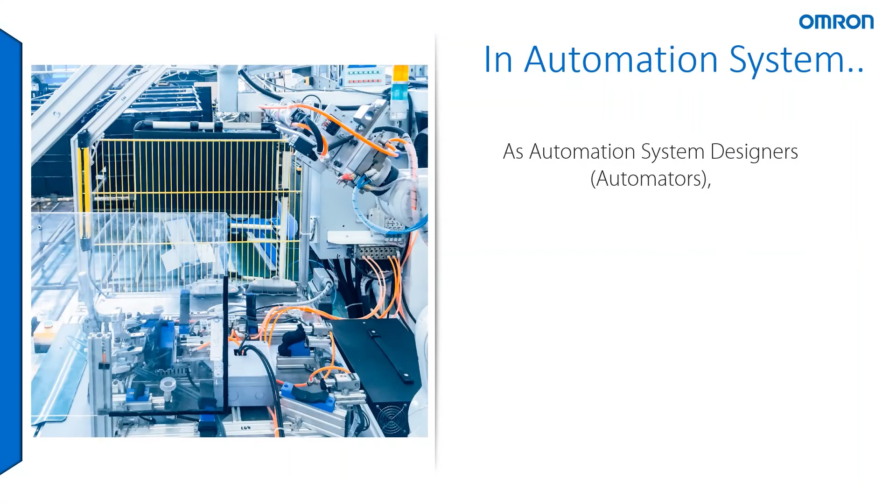In any automation system, you as automation system designers, automators, do you think that safety circuits are necessary? Please share your opinion on the screen.

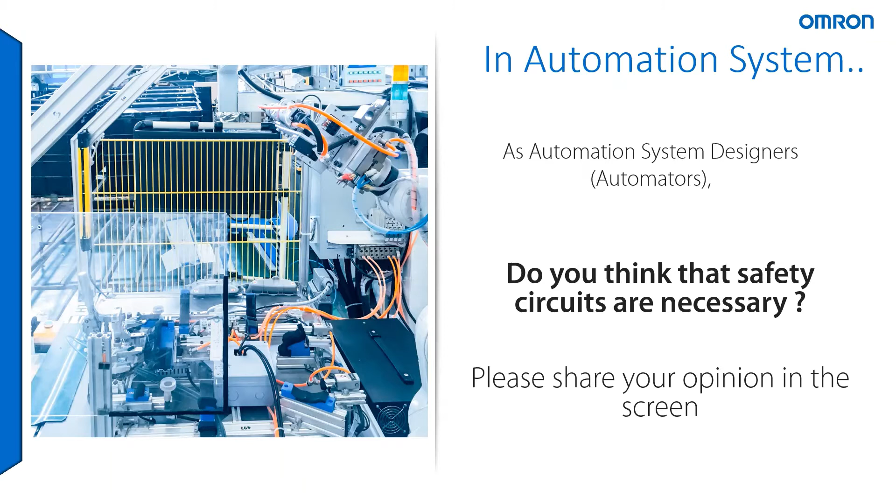Safe automation is everywhere. You, as automators, during the design stage should analyze the hazards and evaluate the risk generated in the machine and include your proposal in the design to make the machine safe. So in Europe, all kinds of machines should have several circuits such as source of power, control system, and safety.

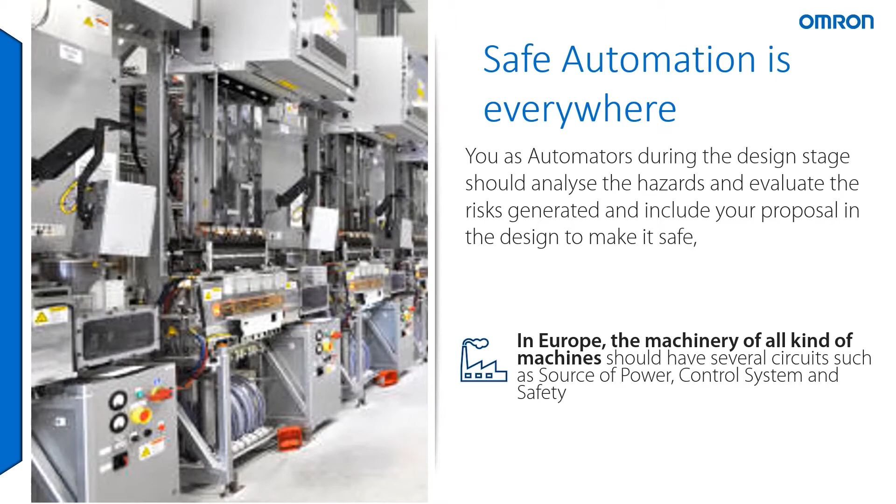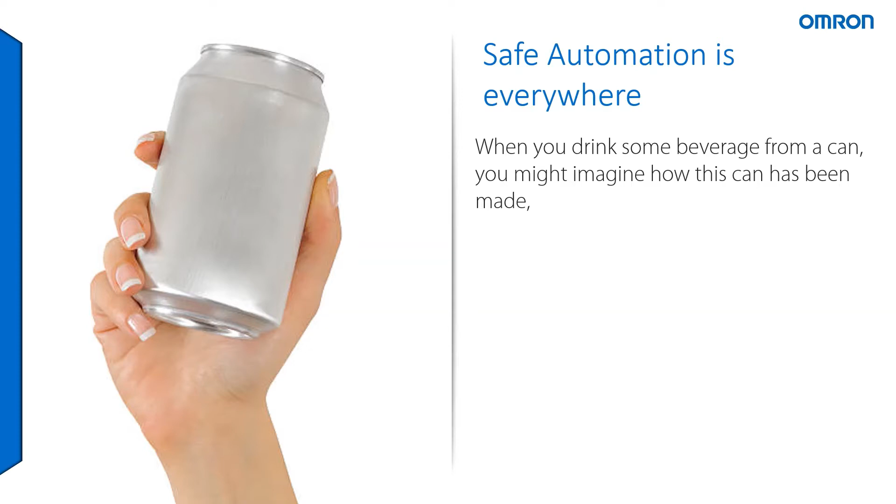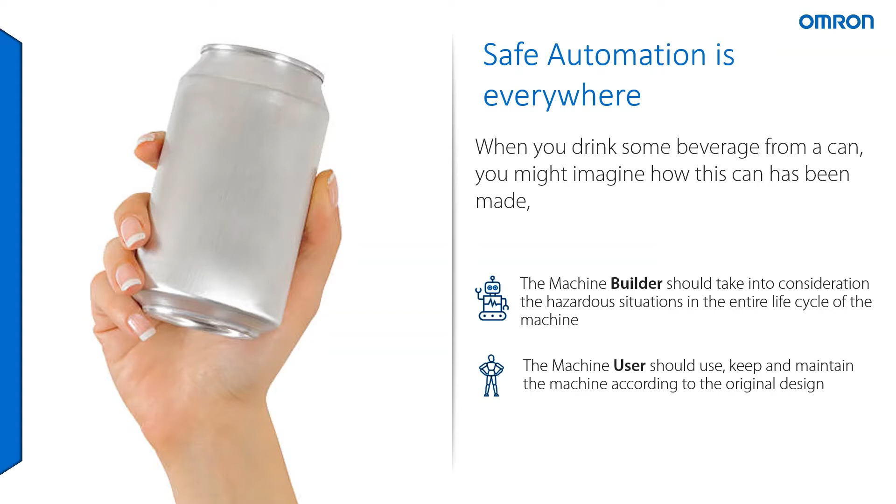When you drink some beverage from a can, you may imagine how this can has been made. The machine builder should take into consideration the hazardous situation in the entire life cycle of the machine. The machine user should keep and maintain the machine according to the original design.

The European Legal and Technical Framework, which is mandatory since 1st of January 1995, forces some different stages in European machinery. So that means if you are outside of Europe, you don't need to fulfill that. But if you are selling or using machinery in Europe, you are forced to use that. You can identify that by looking for the CE marking logo on the machine.

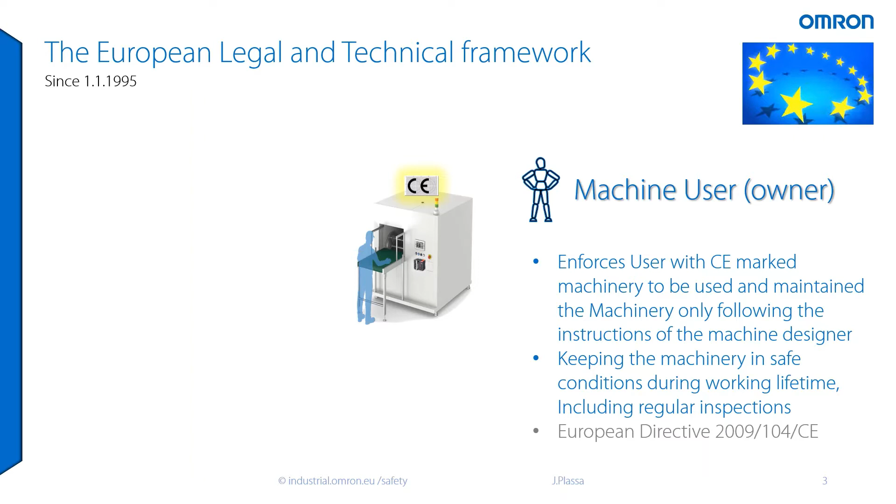For the machine user, which is the owner, the production, it enforces the users of CE marked machinery to use and maintain the machinery only following the instructions of the machine designer. It also forces them to keep the machinery in safe conditions during the working lifetime, including regular inspections. You can find further information in the European Directive 2009/104/CE.

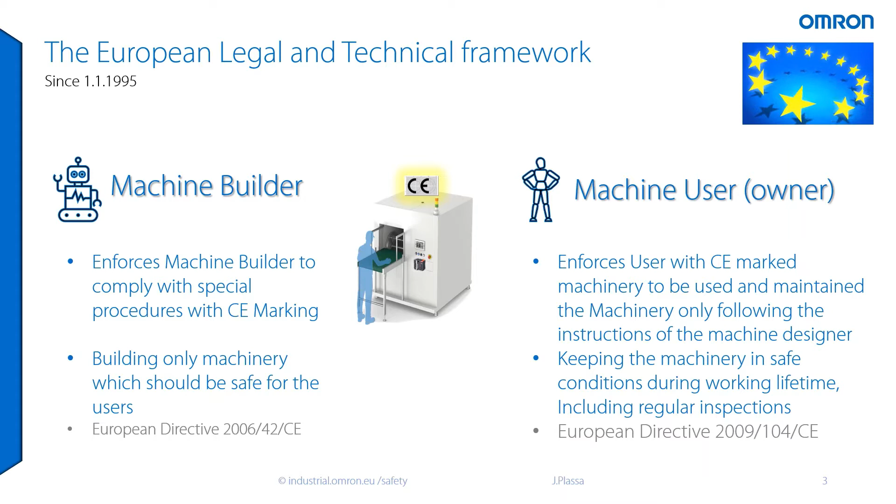If you are a machine builder, it forces you to comply with the special procedures within the CE marking, building only machinery which should be safe for the users. You can have further information in the European Directive 2006/42/CE.

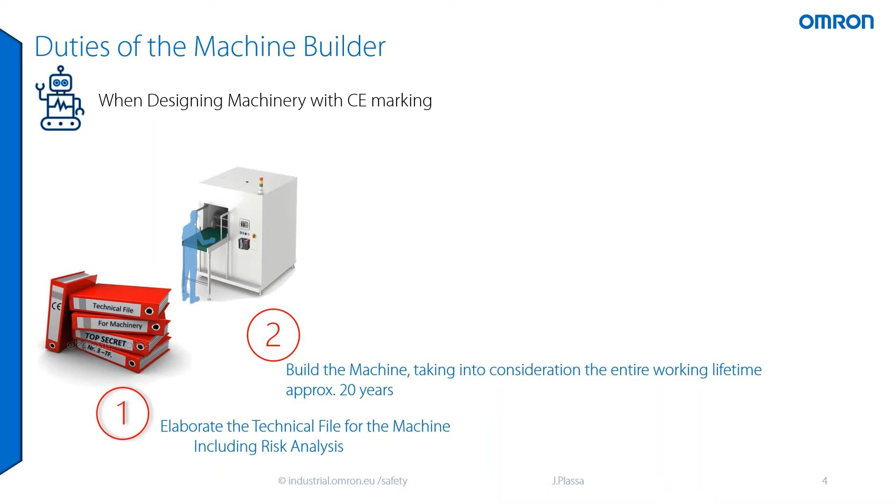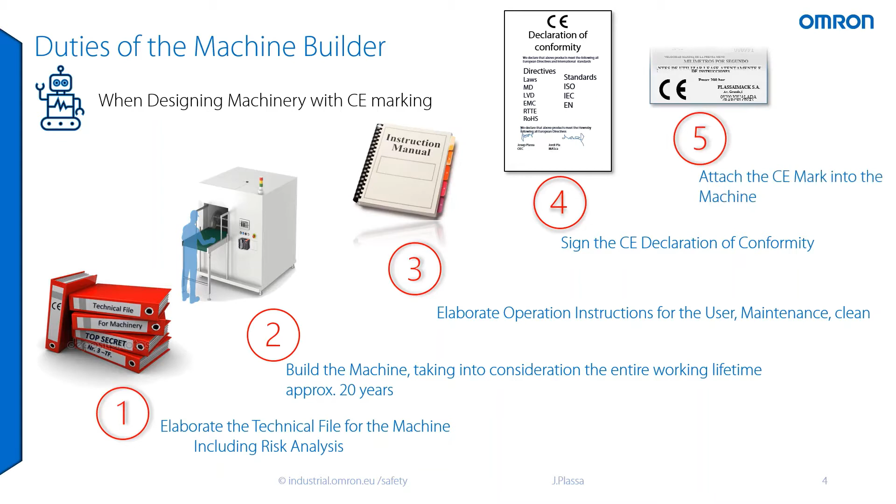But which are the duties of the machine builder when designing machinery with CE marking? First of all, elaborate the technical file for the machine, including the risk analysis. This information is top secret and needs to be kept in the machine builder facilities. Secondly, build the machine, taking into consideration the entire working lifetime, approximately 20 years. Third, elaborate operating instructions for user maintenance, cleaning, etc. Fourth, sign the CE Declaration of Conformity. Fifth, attach the CE marking to the machine and also put the CE logo.

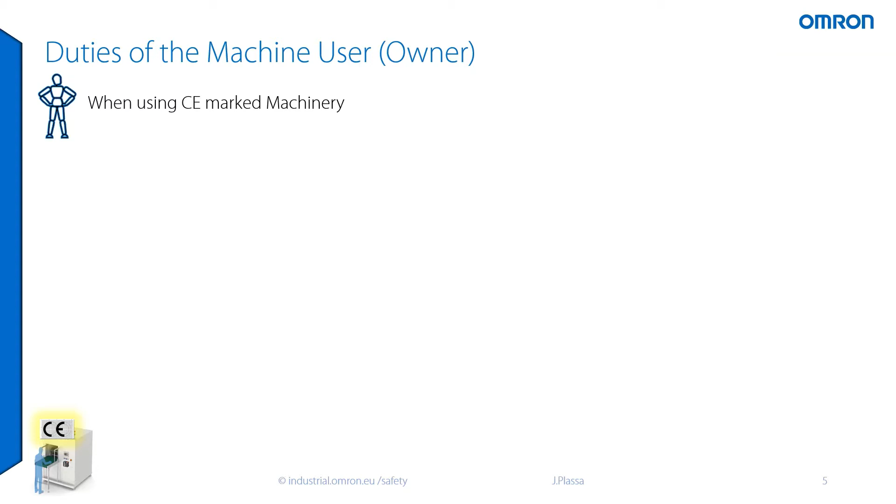But in case you are maintaining this machine, which are the duties of the machine user, the owner, when using CE marked machinery? Step number 1, which is the 6th in the entire system, is accept or reject the machine and use it according to the operating instructions manual. So you should review that.

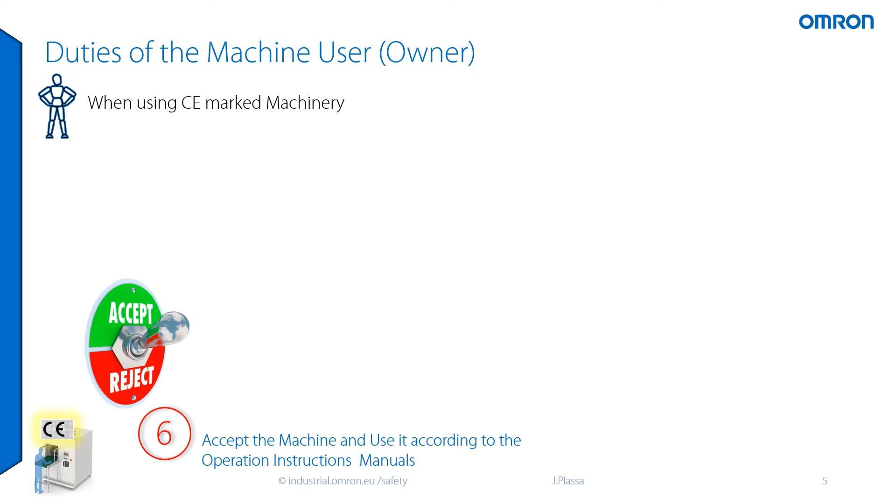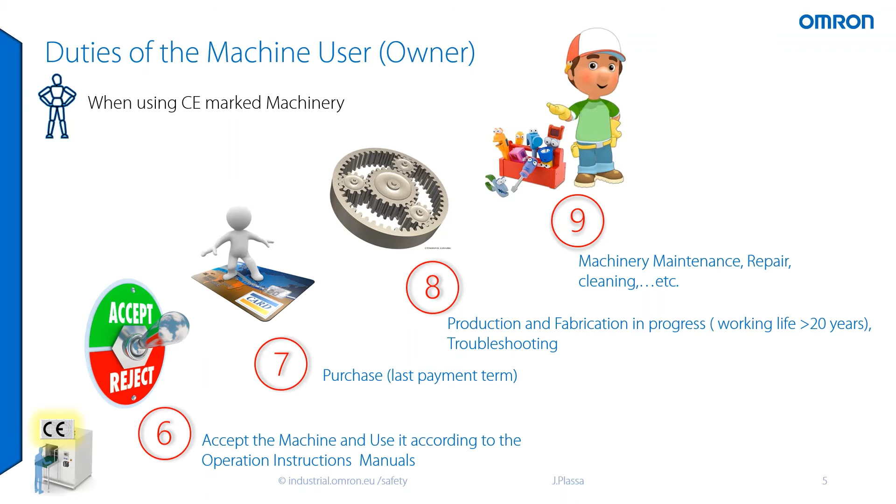Step number 7 is purchase, the last payment term. 8th is use and production, fabrication in progress during the entire working life, over 20 years, and also do maintenance and troubleshooting. Maintenance, repair, and cleaning are also a stage of the production in progress, and finally put the machine out of order.

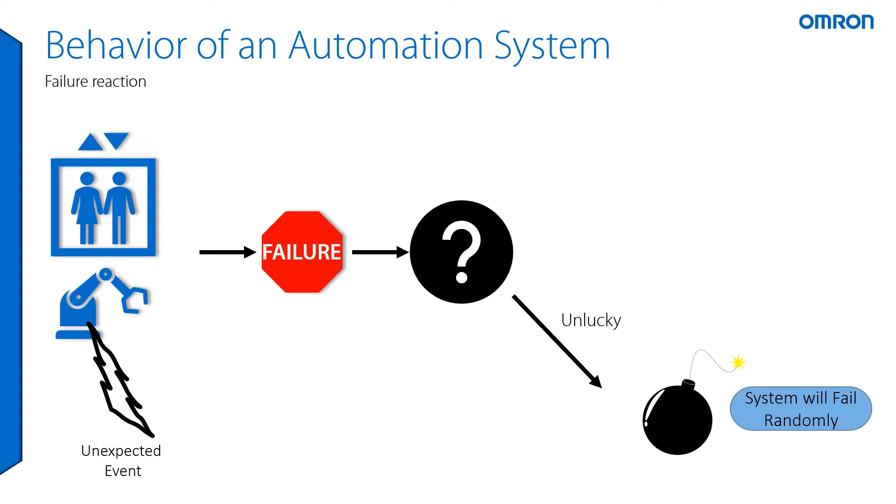But what is the behavior of an automation system? What is the failure reaction? Any automation system or automated part can have unexpected events, but what is the reaction to failure? If we are unlucky, the system fails randomly. If we are lucky, the system fails sporadically. If we are really lucky, the system doesn't fail or fails sporadically. So we must anticipate these failures and react in a safe way.

So, bearing in mind you have these 4 possibilities, in which status will you be? Number 1, number 2, number 3, number 4. The safety systems are classified in 5 levels: performance level required A, B, C, D, and E, independently of which safety function it is. It could be an emergency stop or protective stop.

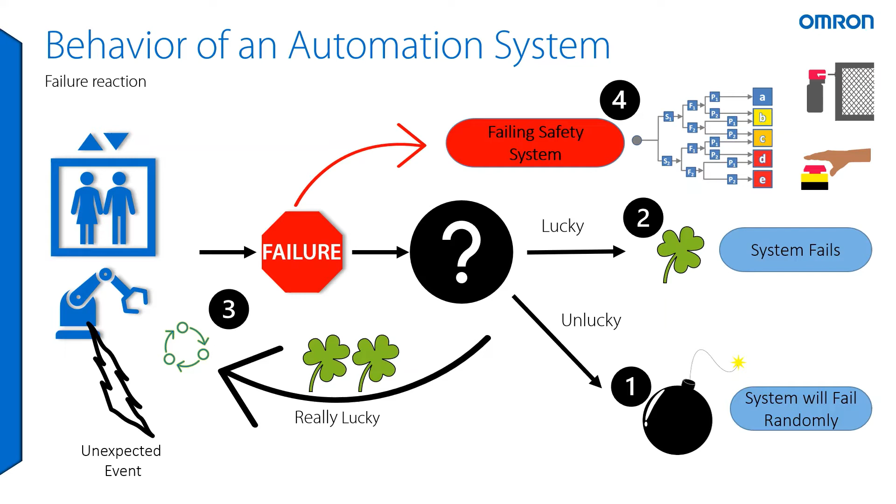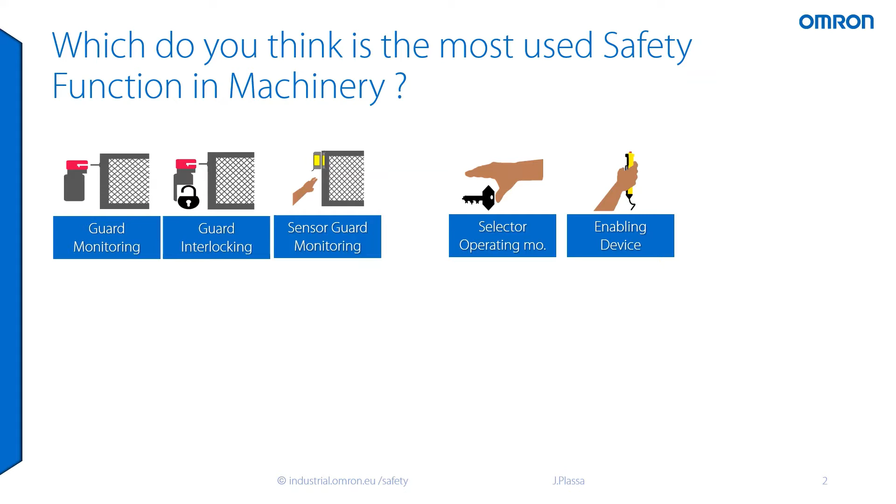Which do you think is the most used safety function in machinery? Guard monitoring, guard interlocking, sensor guard monitoring, operating mode selector, enabling device, emergency stop, safety light curtain, safety protections, safe laser scanner, safety mats or edges, and safe monitored speed.

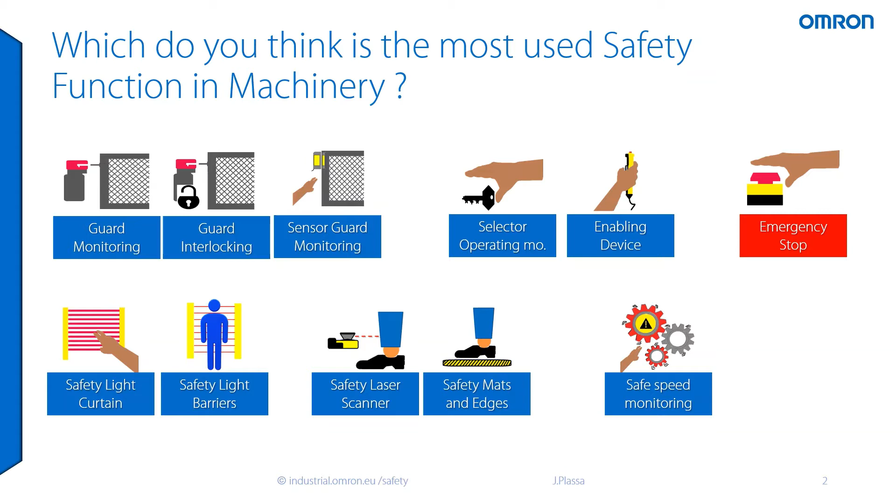According to the German Machine Builder Association, and based on an analysis made on 300 machines, the most used safety functions are emergency stop, 99% of the cases, guard monitoring, 81%, guard interlocking, 73%, operating mode selection, 58%, safety light curtains, 56%, sensor guarding monitoring, 52%, enabling switches, 49%, safety light barriers, 49%, safe speed monitoring, 44%, safe laser scanner, 23%, safety mats and safety edges, 22%.

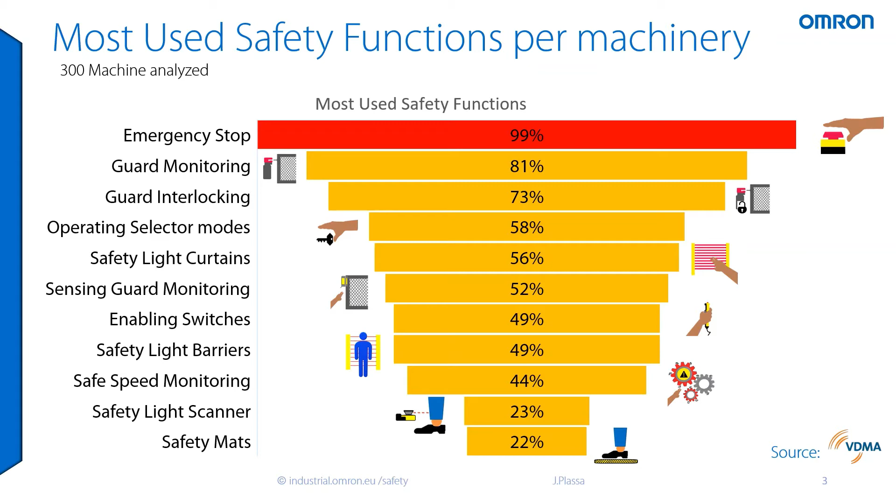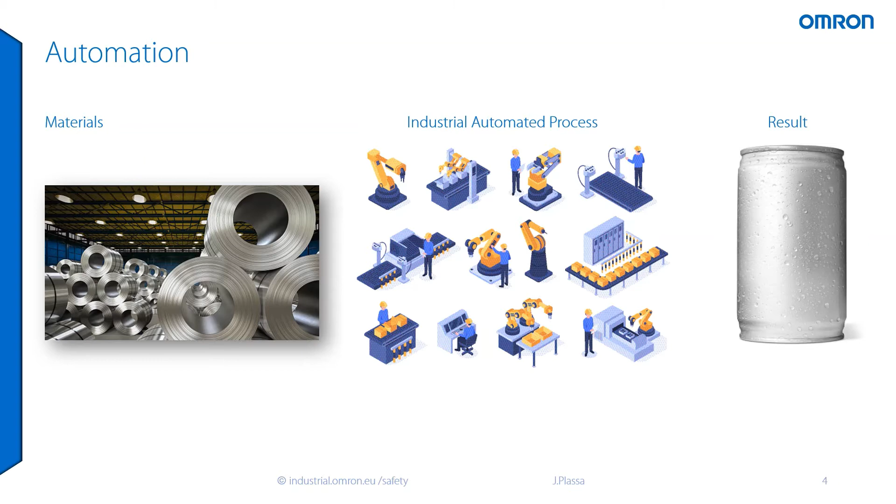In any industrial automated process, we are mixing humans with different operations and machinery, and that creates some risks. In any process, we need to integrate safe automation and the interaction among these hierarchies.

Let's have a look at the example of emergency stop. So if someone presses the emergency stop because he's in an emergency situation, the information will trigger the input. We have a kind of logic which will end in power off, removing the energy on the dangerous movement, and in parallel will inform the protective stop layer and also the regular situation layer. So we have different interactions on the hierarchies for an emergency stop situation.

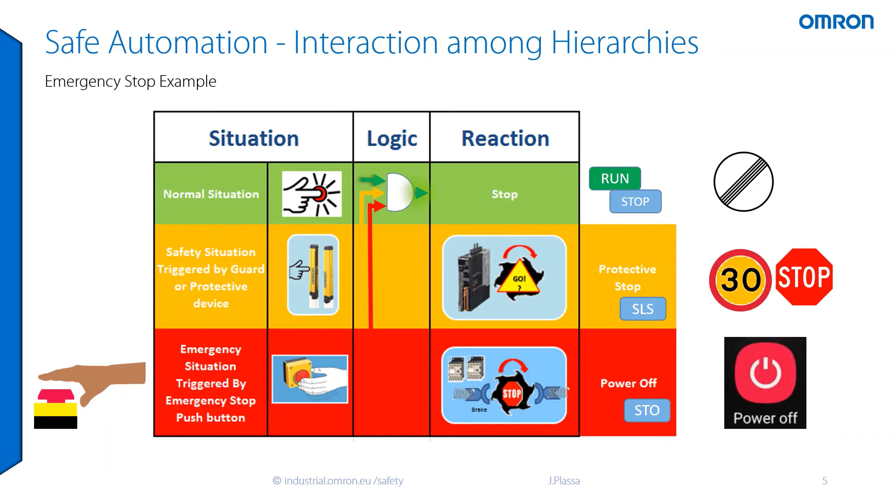Let's have a look at one example. This example is a kind of machine, an empty can palletizing machine, which palletizes empty cans into a pallet.

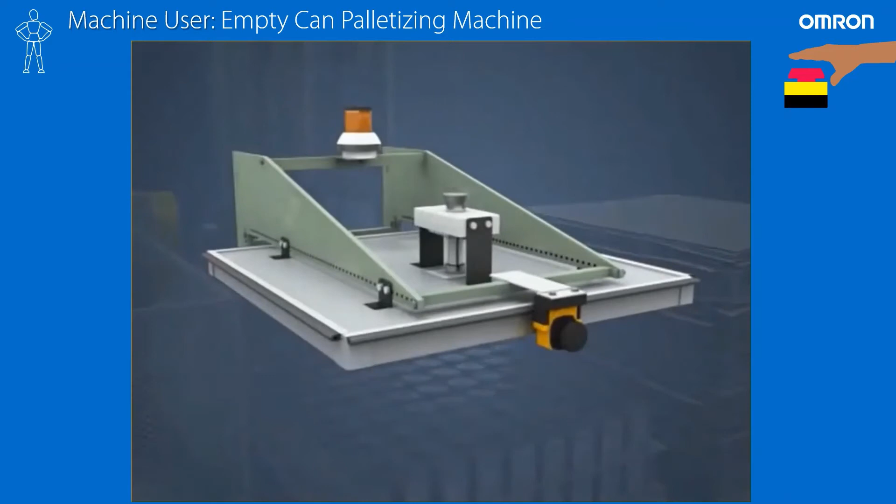We need to take into consideration all dangerous movements and therefore the hazards that exist, which are the moving and up and down movements. This machine needs to be observed for any position and any parts in process, like processing, maintenance, using the machine, etc.

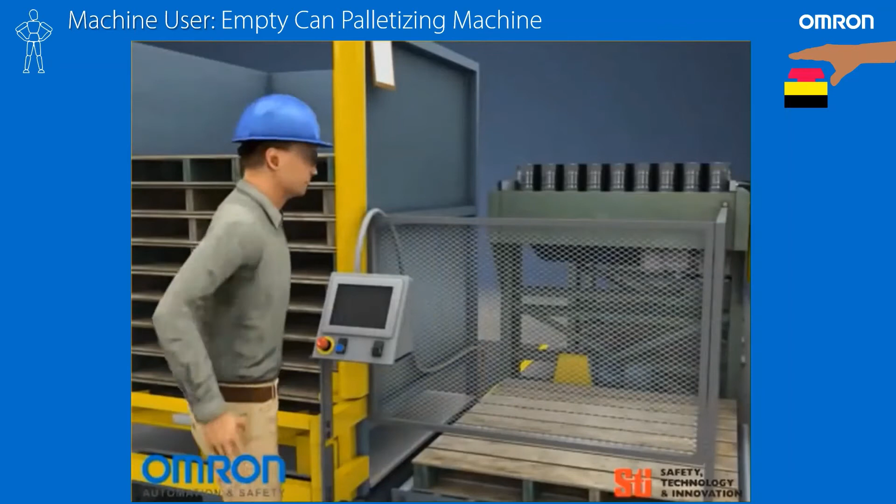What should happen if, for some reason, somebody sees an emergency situation and needs to press the emergency stop push button, like this guy? A single human action needs to disconnect, power off the dangerous movements, as you can see in the image.

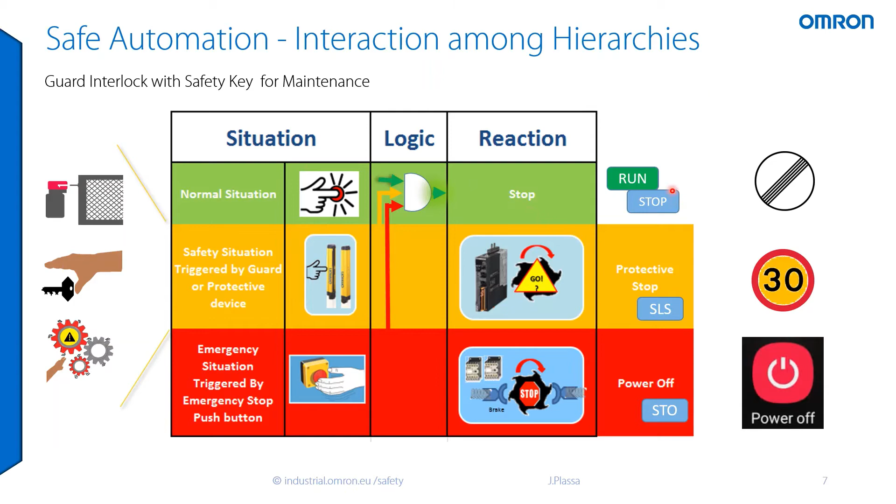And together, that is the second signal that we need for the layers and hierarchies for starting or stopping the machine. Let's have a look at the can liquid filling machine.

This can liquid machine works at regular speed, but when the operator needs to do some activity, we start the safe slow speed and direction. We can open the door, do the safe maintenance in a safe way, and also in parallel, if an emergency is needed, the emergency stop circuit will power off the machine. So we can work in safe maintenance mode with all safety warranted.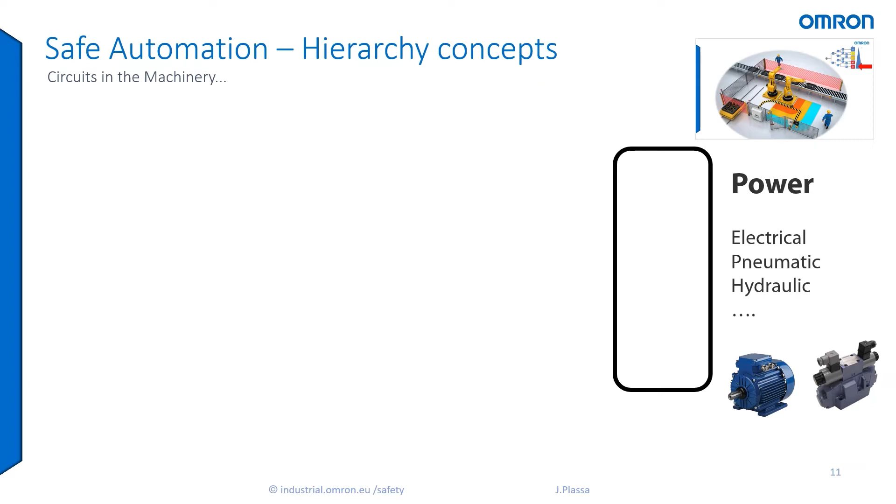We have the control system, which can be electrical, pneumatic, electronic, programmable. And also we have the small intersection, which is the safety related parts of the control system, which can be electrical, pneumatic, electronic, programmable. These safety parts can be combined only with the control system, which is marked here with number 1, or these parts can be interacting with control system, power, or safety.

Number 3 marks only the safety control part with power. And number 4 marks only the section which is safety. So this is the hierarchy concept and interaction of the circuits.

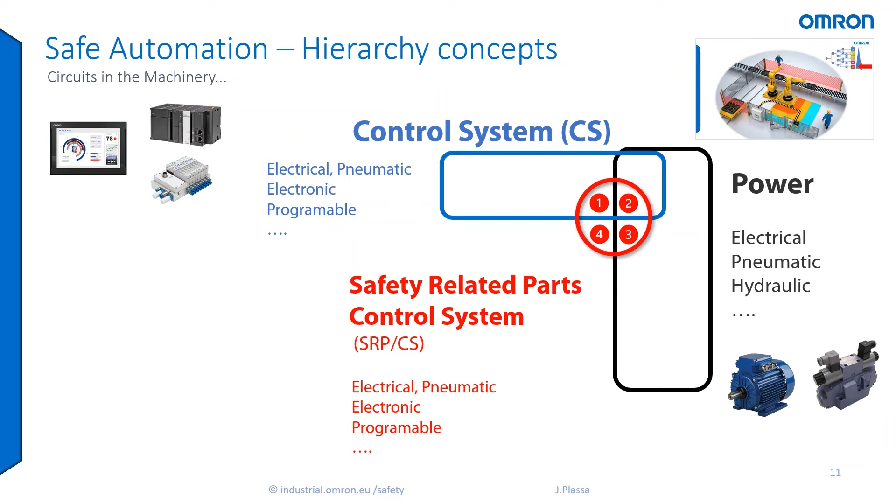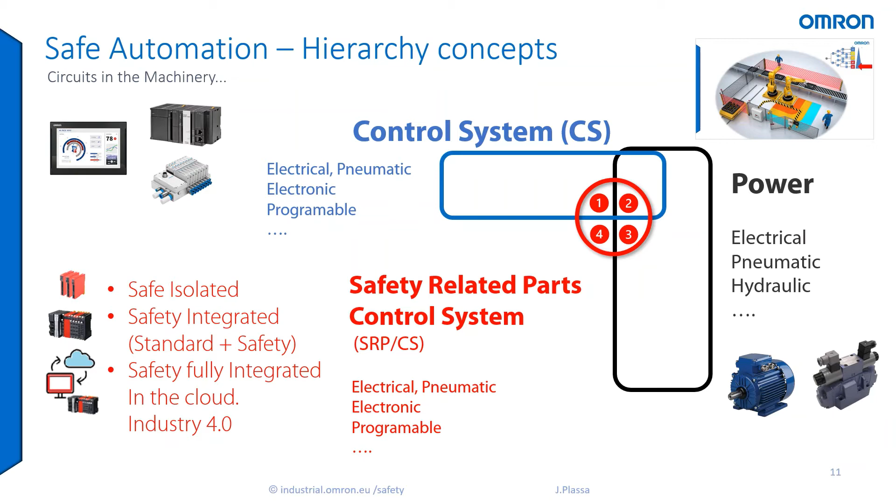And we need to design all machines taking into consideration that the safety related parts of the control system can have several positions, like safe isolated, safety integrated, standard and safety, and safety fully integrated also in the cloud, exchanging information in the cloud for Industry 4.0.

Now let's have a look at the required information for machinery, because many of these components are really fashionable, but they are not legally demanded. So let's start with the cloud.

The cloud uses a lot of components, and their duty is processing and sharing information and statistics. There is no legal requirement for that. It's just a market demand.

Let's continue with the tower light. The tower light has the purpose or duty of giving information about the status of the machine for multiple users. That means this part is mandatory for the legal requirements. The way that you use the tower light is on the design, but the colors and the information are on the standards.

Let's continue with the touch panels or human-machine interfaces. The purpose of that is to give information to a single user, and they are not mandatory. It's a trend or market demand, very useful, very powerful systems, but they are not legally required.

Let's continue now with the push buttons and lamp indications. Again, these are for single user information, the operator who has the push buttons in front, and they are also mandatory. So if you want to use push buttons separated from light bulbs, or integrated, it's on your own design, but they are mandatory.

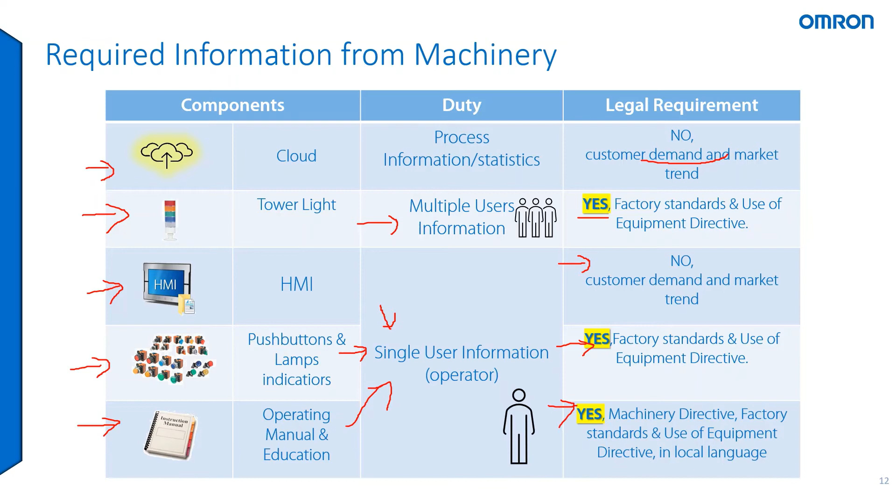And last but not least, the operating instructions, manuals, indications, and education. That is also single user information, but it's mandatory according to the machinery directive and equipment standards.

Let's start with a deep look at the typical safety module internal functionality. Here you have some examples of how they work internally.

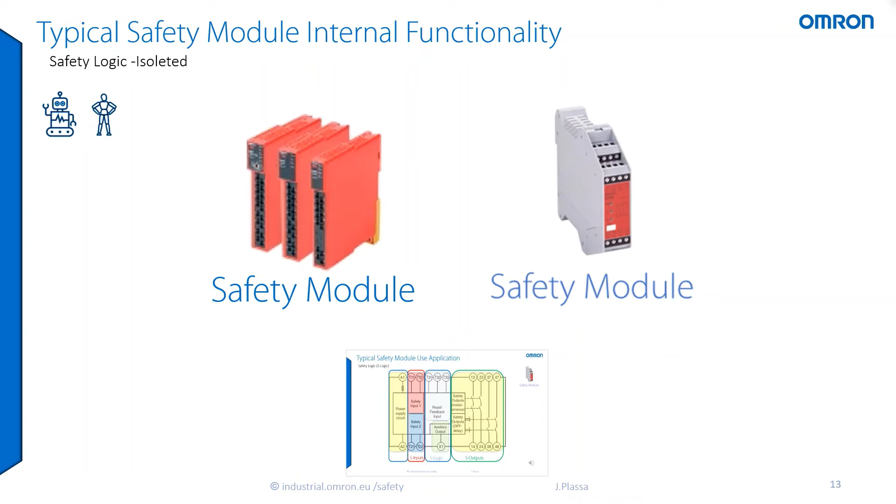Let's start first in understanding what the typical safety module internal functionality is. Here we have a safety module, how it looks internally and how it's designed, which we need to take into consideration for the application and installation. First of all, we have the safety inputs, channel 1 and channel 2, T11, T12, T21 to T22. Secondly, the safety outputs. As you can see, we have 13, 14, 23, 24, which are instantaneous contacts, and 37, 47, 38, 48 for the delayed safety outputs. And we have the logic and the power circuits represented here.

All safety circuits need to work with positive logic. And what is this approach? When we are working with positive logic, that means when the protections are closed or the emergency stop is not pressed, all signals must be on when the safe situation is protecting. Be aware of the individual functionality of each function. When you open a guard or press the emergency stop or actuator, or any failure or error occurs, the signal must be disconnected. The safety functions affect all dangerous movements. Therefore, we must take on all consequences, such as protective stop, monitoring, emergency stop, disconnect.

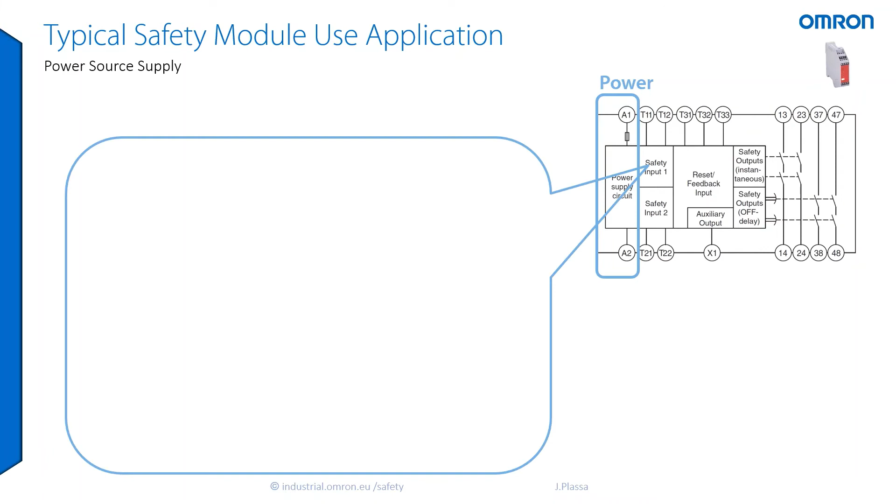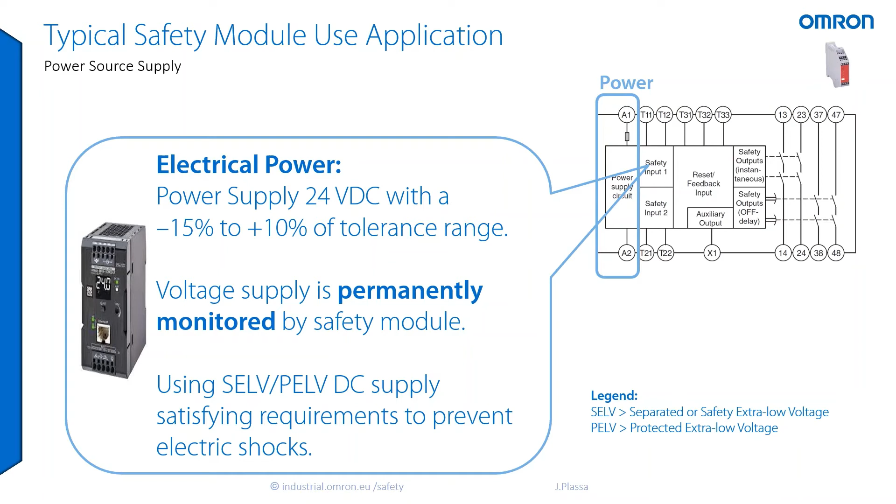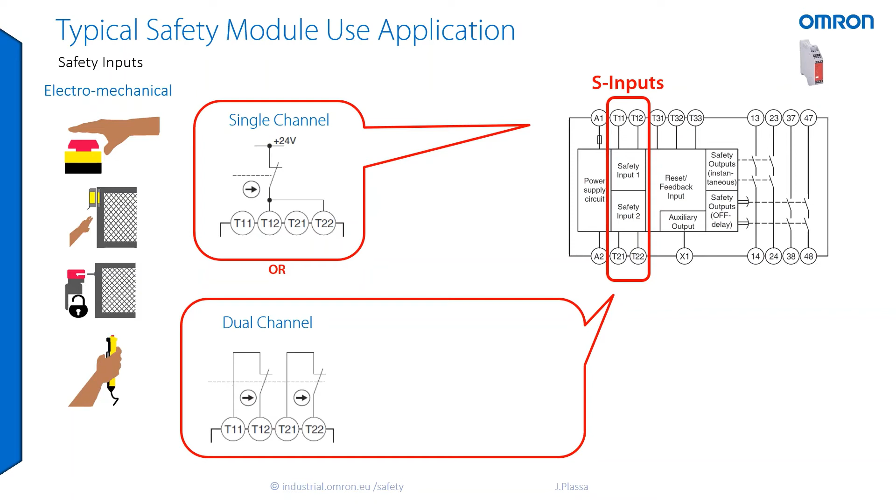The power source supply, electrical power. The power supply is regularly 24 volts with a plus/minus tolerance range. The voltage supply is permanently monitored by the safety module, and if it's out of range, we disconnect. Using SELV and PELV DC supply satisfies the requirements to prevent electric shocks. The safety inputs. We can have single channel or dual channel, depending on which kind of inputs we are using, like electromechanical inputs from emergency stops, doors, etc., which are electromechanical contacts. Or we can use safety light curtains, with OSSD inputs, which are output signal switching devices.

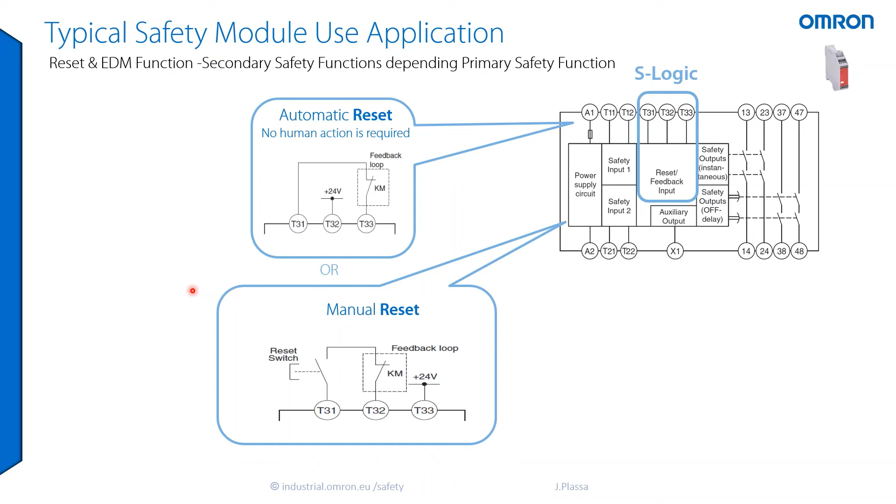But the primary safety function, which could be a door, an emergency stop, a light curtain, etc., needs to activate or switch off some outputs. Before this signal is understood, we regularly have in a serial connection what we call EDM, which means external device monitoring, depending on the output components that we are switching on and off. After the primary safety function is activated, the human observes, thinks, and acts correctly. Everything is under control. Contactors or elements have been switched off or powered off, so they close the contacts, and we'll be in this status. Then pressing and releasing the reset button will activate the signal on, off, and the module will start operating.

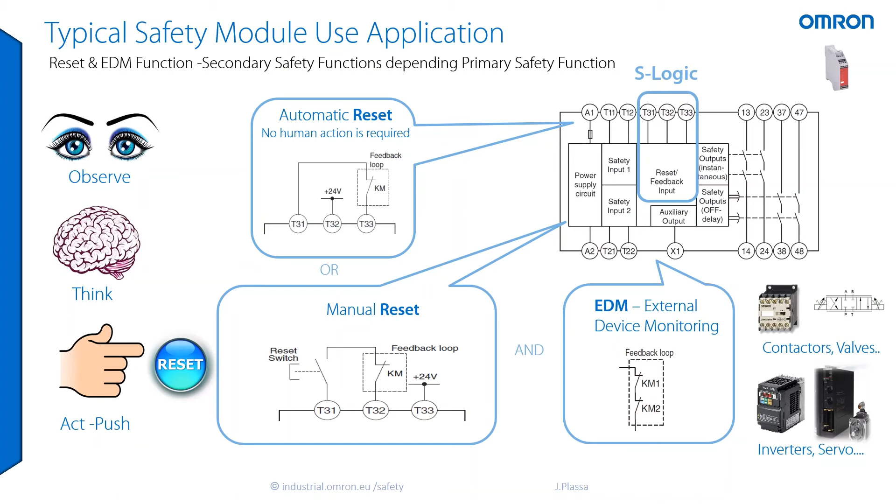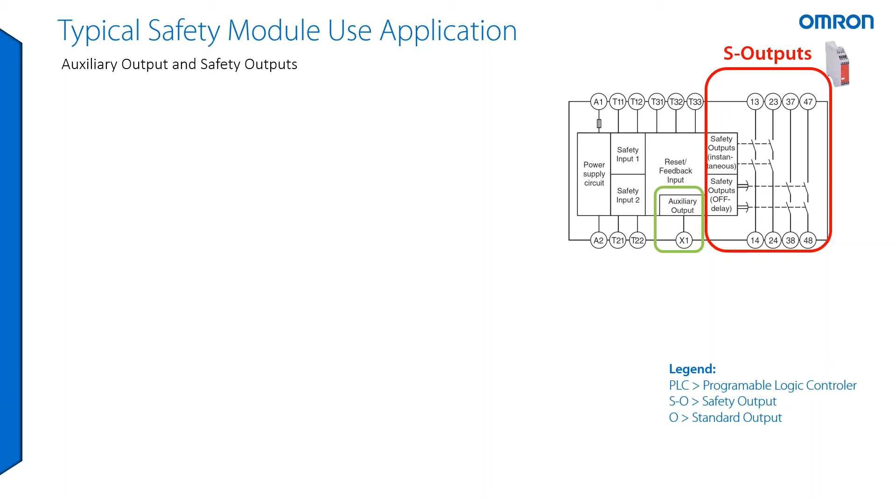Now it's time to interact with the safety module outputs. We have two kinds of outputs: auxiliary outputs, non-safe, and safety outputs. Let's start with the auxiliary outputs, whose purpose is to connect with the standard PLC and light tower to inform operators or the process which status we are in. These outputs are not suitable for safety functionality. And the safety outputs: depending on what we are connecting, contactors, valves, inverters, or the output circuit, we will use instantaneous safety outputs or delay-off or delay-on safety outputs.

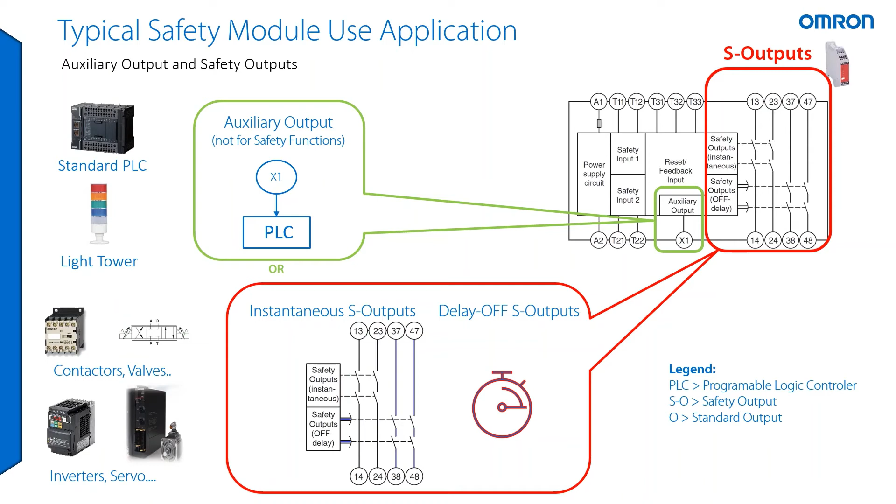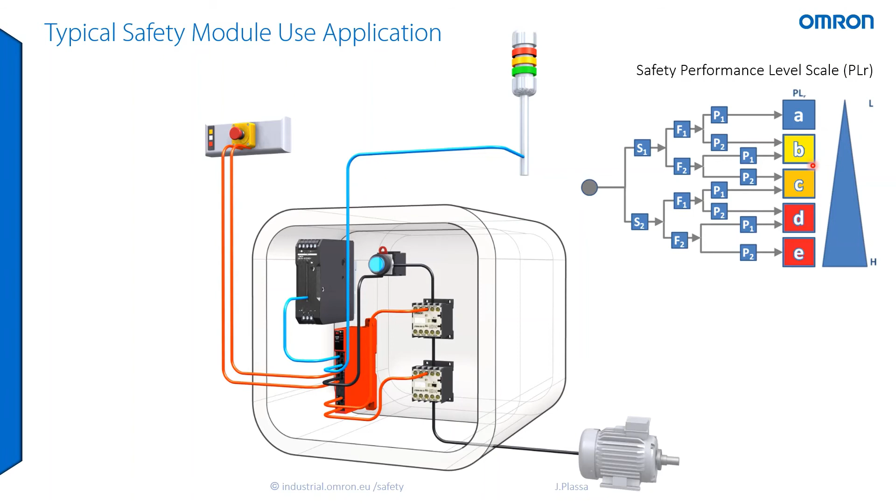This conceptual drawing shows us the typical safety module application with different colors. The cables here indicate which part is which: blue for the standard indication, red for the safety circuit, black for the power control system. The safety circuit, painted in red, is directly linked with the performance level required. We have 5 performance levels, from low to high. Depending on the danger our machine has, we need to identify and reply to some responses in the risk assessment. And we will have the result of performance level A for low, B or C for medium, D or E for high.

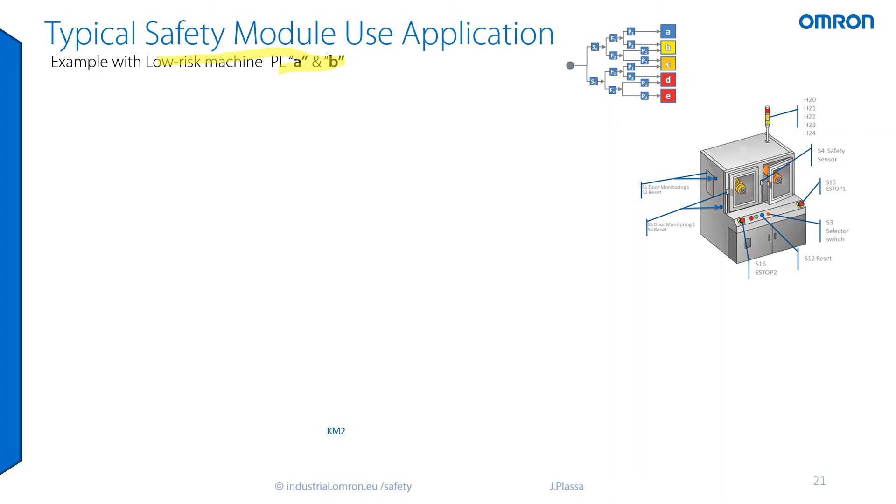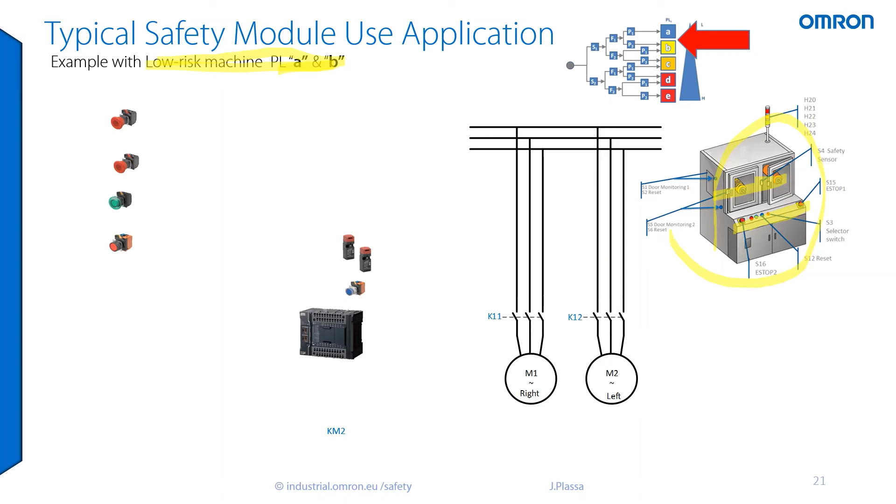Now we will have an example of a low risk machine, which is performance level A or B. Let's have a look at the power part. We have 2 motors for this machine, which are affected by the push buttons and also the door switches in the lowest performance level we can find. So we identify the safety components, in this case emergency stop, start, stop, the door switches, etc. And here we have the electrical wires.

In this case, we are using a standard PLC, emergency stop push buttons number 1 and number 2, start and stop push buttons, the guards, and also the resets. Electrically, the emergency stop push buttons are serially connected with the standard stop push button, which are inputs to the standard PLC. And also in parallel, we are cutting the power source of the common part of the outputs. So in the case of emergency stop, we will inform the standard PLC with the input, and also we cut the power so that the outputs are ensured to be switched off.

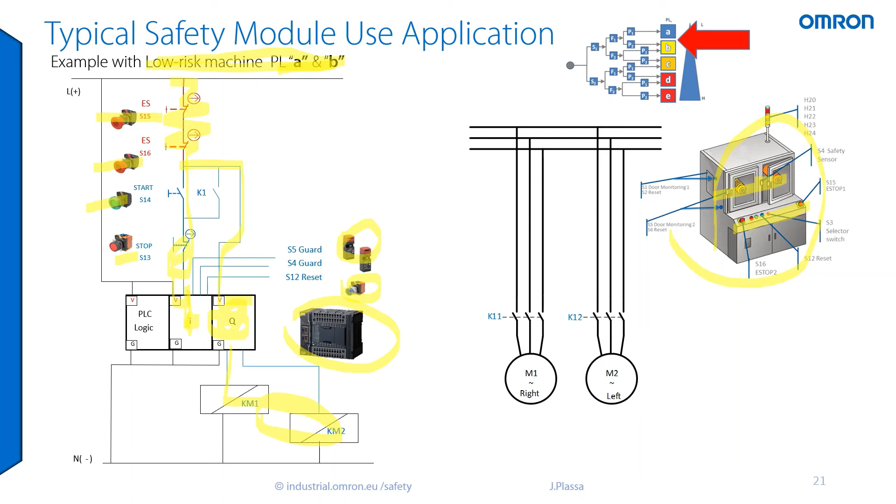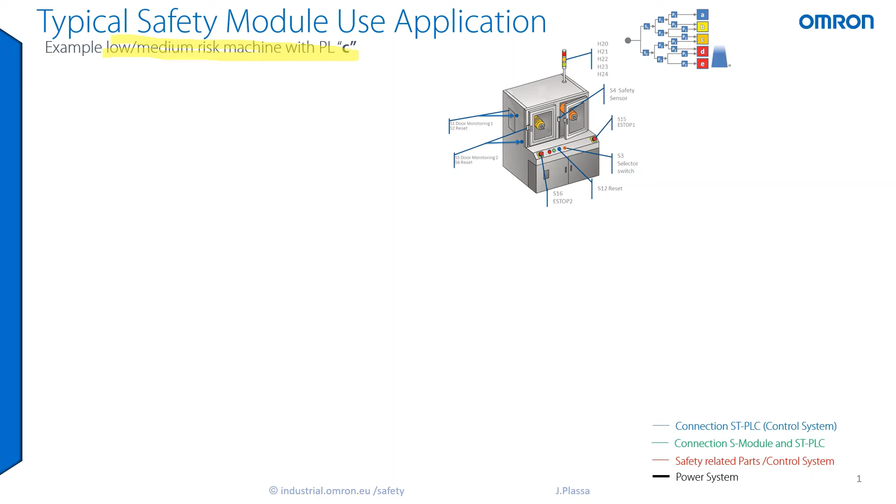Here we have an example of a low medium risk machine with a performance level C. The power part and the rest of the examples: in red, safety related parts of the control system; green, connections with the safety module and a standard PLC; and blue, connection of the standard PLC with the control system. The emergency stop push buttons are serially connected to the safety module. Each guard is connected individually with the safety module and has its own individual reset push button functionality, same as the emergency stop individual reset functionality.

And the output of the E-stop module is connected with the start and stop of the machine and also informs the standard PLC of the situation. In parallel, we are cutting the common of the power source of the outputs of the standard PLC, and we are powering the door monitoring safety P-stop guard. With that, we ensure that whether we are opening the door or pressing the emergency stop, we are disconnecting each of the contactors, which will disconnect each of the dangerous motors.

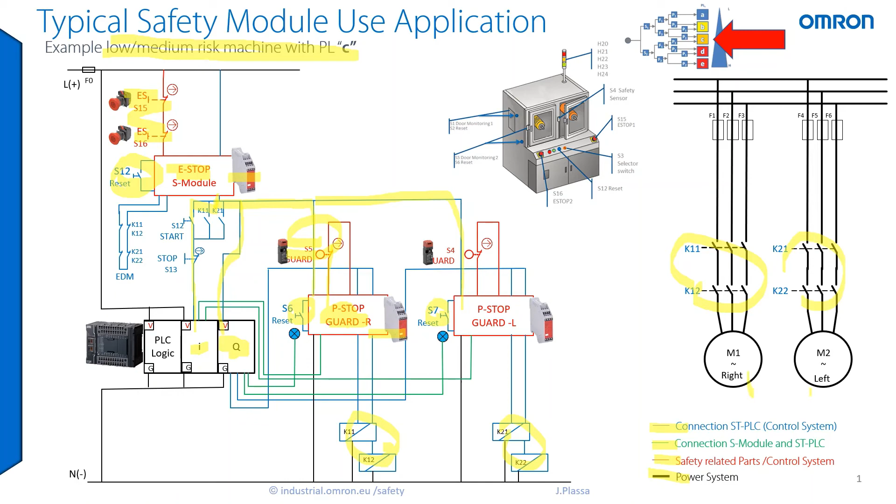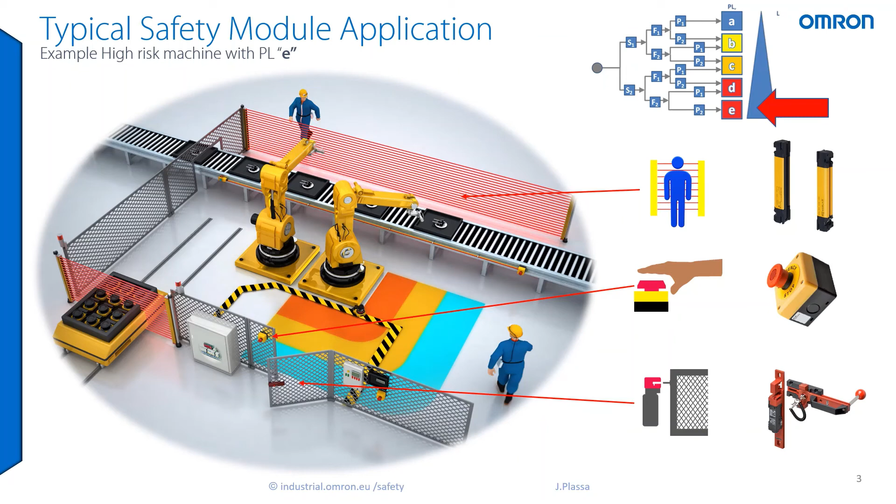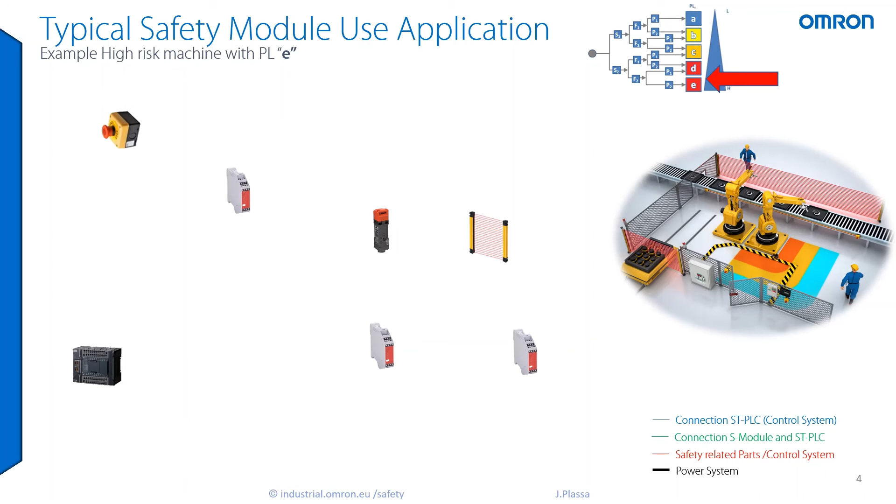Now, our last example, a robot cell which is producing big pieces for automotive. In this case, the performance level is between D and E, which is a high required performance level. We will focus on the safety function of emergency stop, the safety function of light curtain, and the safety function of door monitoring and guard interlocking. Let's continue with the details in the electrical drawings. First, we need to identify the components: emergency stop, safety relay module, interlock gate, safety module, light curtain module, standard PLC. So, have a look at the wiring.

Here we have the circuit for the emergency stop. As this is a high risk machine, performance level E, we need to wire the module with 2 channels in order to detect errors between them. Also, we will use the 2 channels from the interlock switch wired to the safety module, and also the 2 channels from the light curtains. All these modules will share information with the standard PLC, and they also have localized individual reset functionality. The emergency stop is again switching off the power for the outputs of the standard PLC, and at the same time giving power to the safety module for the protective stops. With that, we ensure that the contactors and all the motion within this area are affected by the emergency stop, the door or the light curtain.

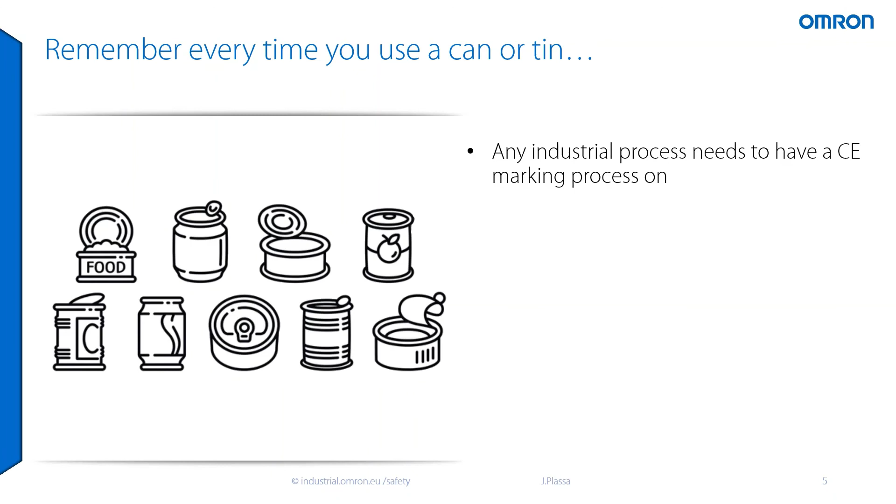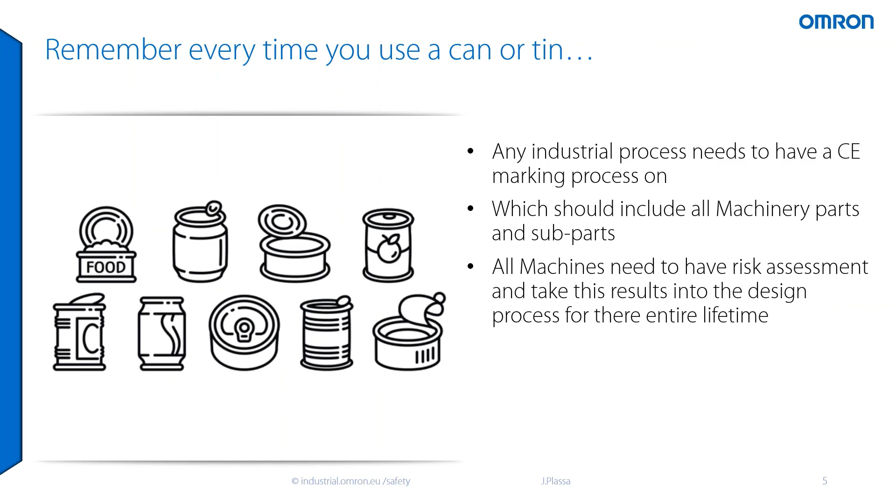Remember, every time you use a can or tin, that any industrial process needs to have a CE marking process, which should include all the parts and subparts. All machines need to have a risk assessment and take the results into the design process for their entire lifetime. Users of the machines need to follow the instructions of the machine and fulfill the periodic safety inspections during all their working lifetime.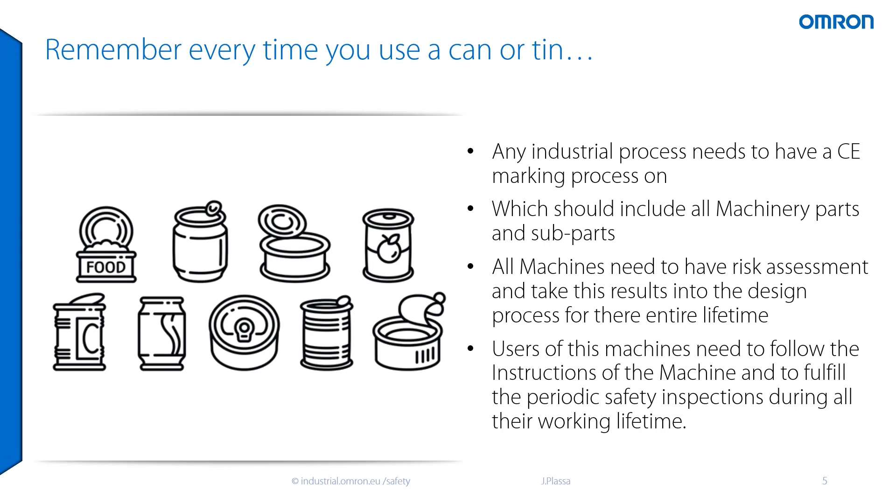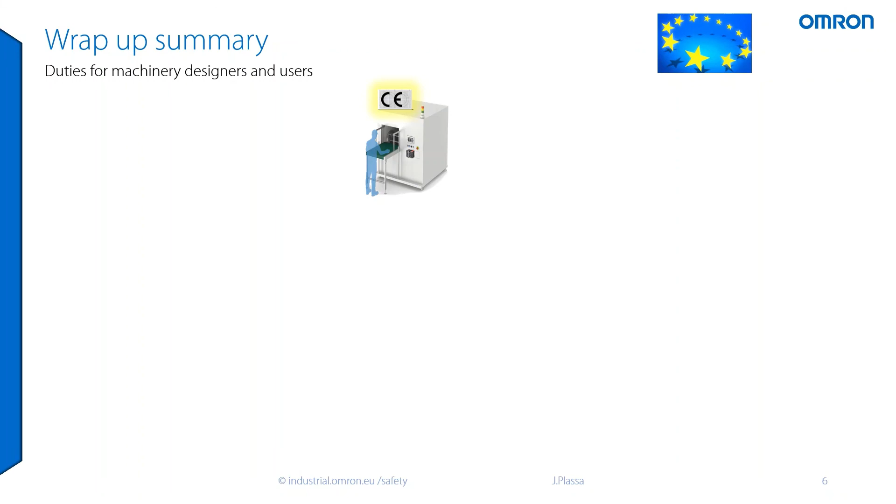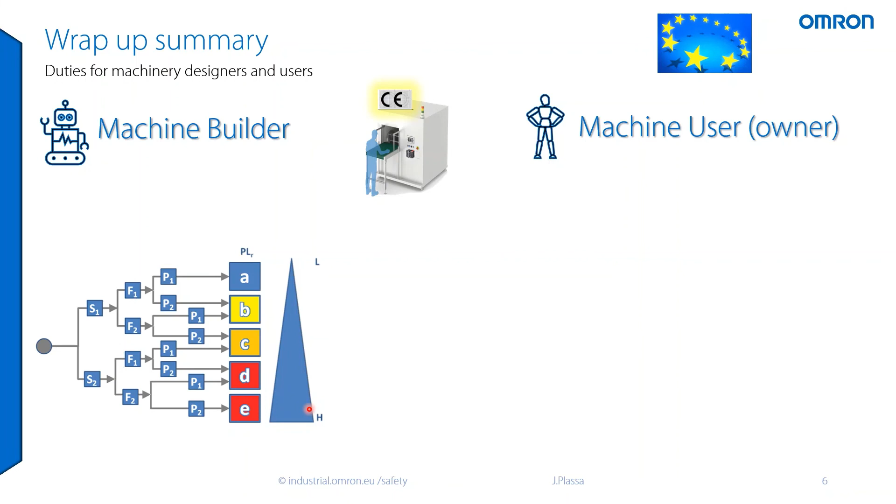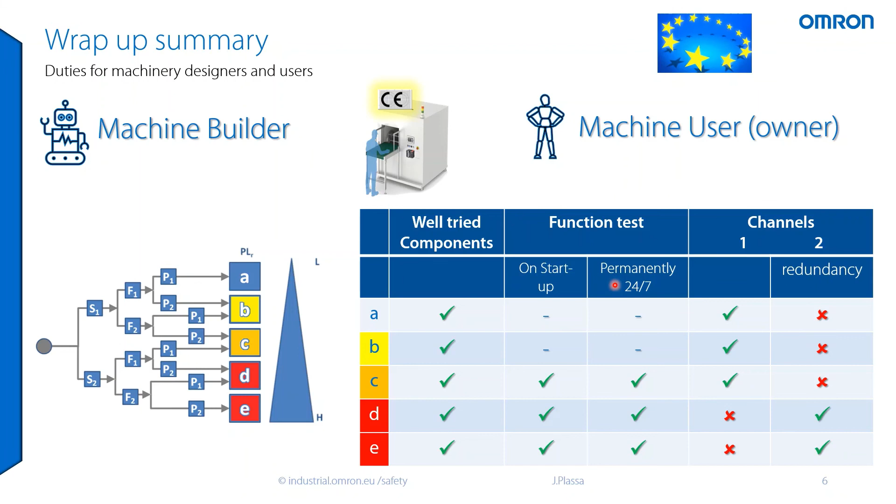Remember the duties for the machine designers and users. If we are inside Europe, the CE marking means that the machine owner or user needs to fulfill the instructions of the machine builder, and the machine builder needs to do the CE marking process accordingly. Also, take into consideration the information from the risk assessment and use it for the performance level required, from low to high. That means we need to use well-tried components for all safety functionalities. The function test will be on startup or permanently 24 hours, 7 days a week, using 1 or 2 channels as redundancy.